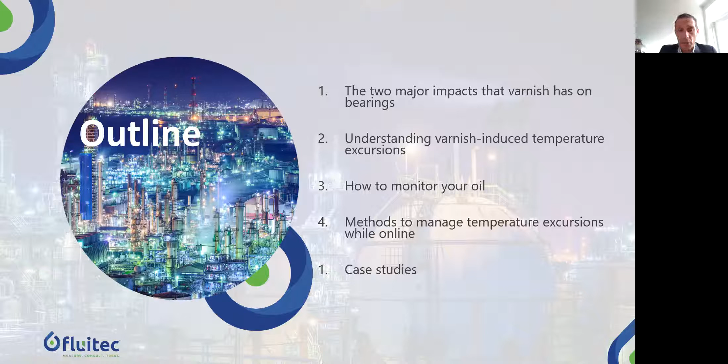And then finally, we will go to the topic of how you want to monitor your oil, and eventually how you can solve the problem if you have a problem of varnishing in your system. Last but not least is a couple of case studies which will help you understand better what I just presented you. Okay, what about varnishing?

What is varnishing? Maybe you heard about that a few times. Varnishing is an organic compound which is a byproduct from the oil that you have in your system, and varnishing can be in different consistencies, so different formats, different colors, and of course there are even different chemistries that make up the deposit. These chemistries are mainly based on how the machine is operated, what is the formulation of the oil, and if you have contaminants, hard contaminants or gas contaminants, which influence the oil degradation.

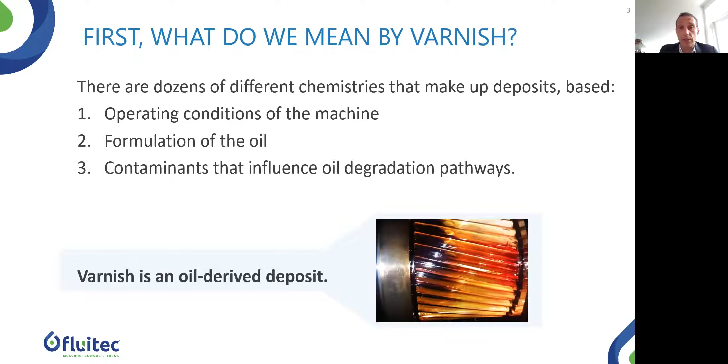So mainly there are four mechanisms which produce degradation in the fluid. First, which is always happening, is oxidation. Oxidation is when the oil is in contact with air, so the antioxidants which are present in the oil will slowly be depleted, and then there will be formation of varnish. Then there is thermal degradation, which is due to sparks, discharge, or microdieseling, hotspots, but that's not what we are going to talk about today.

Then there's one which is mainly common in compressors, especially in syngas compressors: external contaminants like gas, for instance ammonia, or solid particles, or even water, when you are talking about steam turbines for instance.

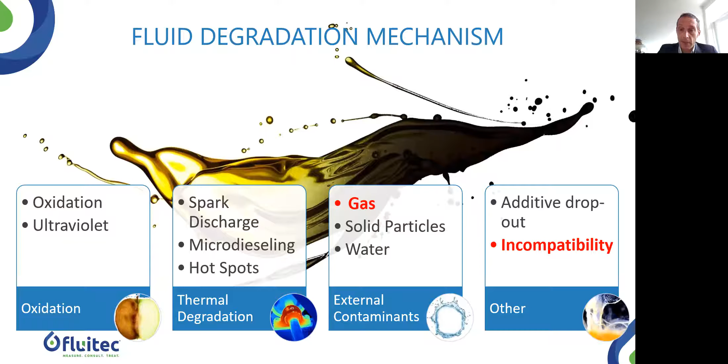And then you have incompatibility. What is incompatibility? Incompatibility is when an oil is mixed with another oil. This is very important because most of the time there are oil companies telling you that you can mix, oh this oil is totally compatible, but it's essential that we keep a very firm rule: the lubricants need to stay isolated from other lubricants.

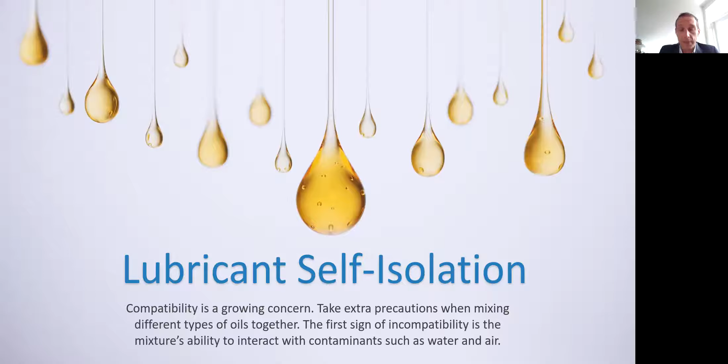This is like how it's happening now in many places due to lockdown. But incompatibility is the first sign that you can see when you have two oils mixed together, so it's creating most likely varnishing. Even the same oil sometimes changes a little bit, like with a new formulation of oil, the existing same oil can sometimes be incompatible and accelerate the varnishing production.

Now that we've talked about varnishing, I told you what is the cause of varnishing, and now we can see a little bit of a picture of varnishing. So varnishing can be like a gel. We see pictures where it's black, or it can be a lacquer, orange lacquer, or it can be even other colors like purple or green or yellowish. And all of this is varnishing, an organic product which is coming from the degradation of your oil.

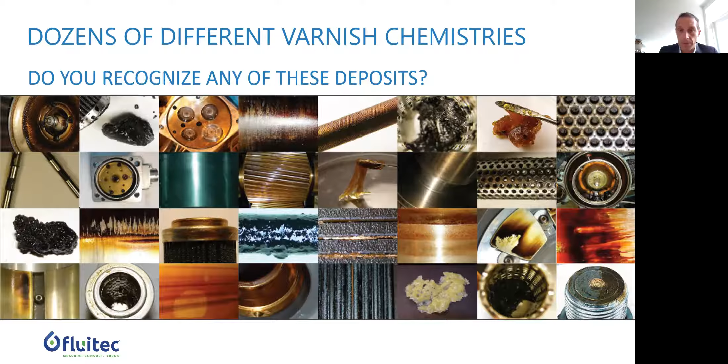So when you have a problem, and now I'm talking more specifically, when you find a problem on your bearing, it can actually be a mechanical problem, but we found almost 50% of the time that this problem is due to chemical change in the composition of your oil. Of course, chemical changes may be due to some other mechanical problem, but these two are correlated. So what we now see is that temperature excursion and wear are both caused by mechanical issues and chemical changes in the oil.

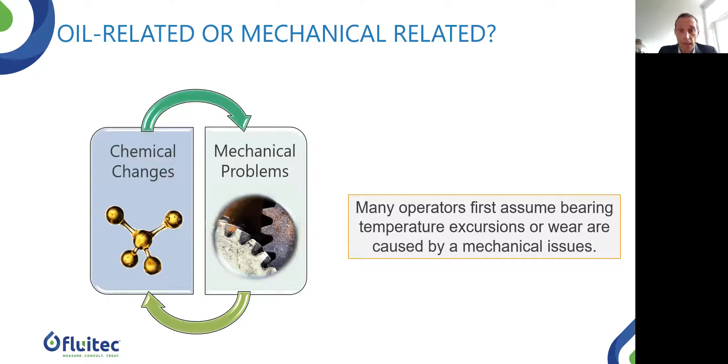So what is the measured impact of varnishing? Actually, there are two measured impacts: one is the increase of wear, and the other one is temperature excursions. So why increase of wear?

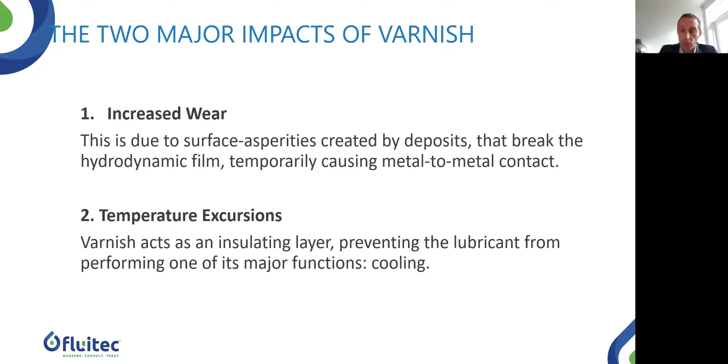Actually, the varnish is a polar compound, and it's depositing on the metal. So it really likes to be attracted and deposit on the metals of, for instance, the bearing. And this compound, of course, changes the film of oil which is created between the rotor, for instance, and the bearing itself. So changing this ends up disrupting the hydrodynamic film and creating inconsistent oil flow patterns.

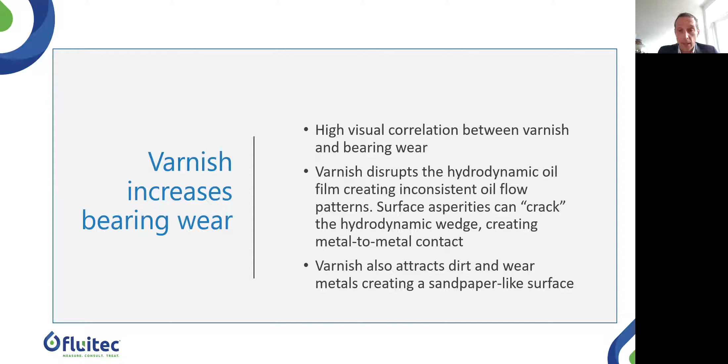So eventually this creates a hydrodynamic crack, which can bring metal in contact again with the other side, the rotor in contact with the bearing. And when this happens, it removes part of the metal, the protection on the bearing.

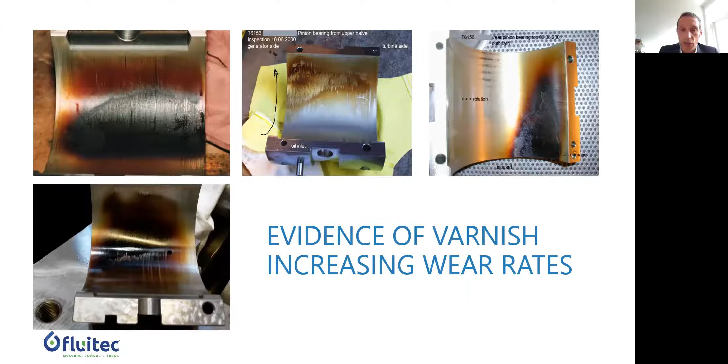This picture shows you what happens, the evidence of varnishing, which increases wear rates. These are pictures of a pinion bearing. You can see on one side the black and orange color, this is where the varnishing has been deposited. This one is quite extreme, but it's a journal bearing where the sign of wear due to metal-to-metal contact is very visible.

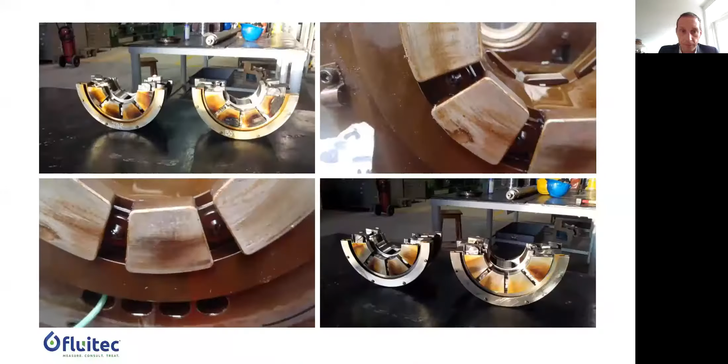Another few pictures about bearing and wear contact. The second problem that varnishing can cause on the bearing is the increase of temperature. Why does this happen? Well, another property of varnishing is that it's a very good insulator, so it prevents the lubricant from performing probably one of its major tasks, which is cooling.

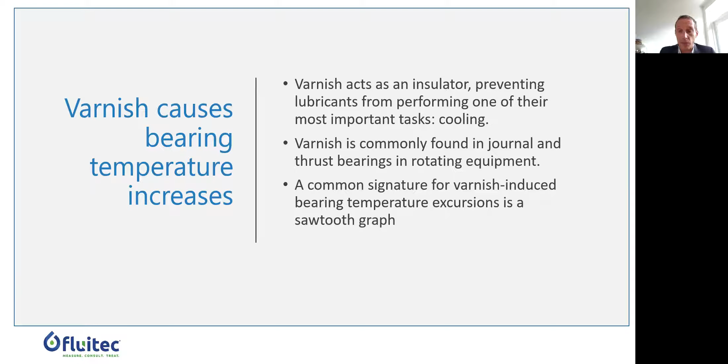This creates a kind of layer, the varnishing is creating a layer between the bearing and the oil, and this is what avoids the cooling effect. This is how you can see that. I'll show you some graphs, but the signal that this is happening is normally what you see as a sawtooth graph in the temperature graph of the bearing. This is the typical graph.

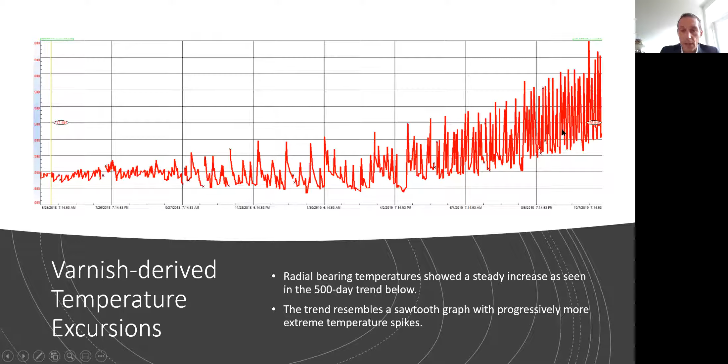At the beginning it's just a little bit, actually less than a few degrees, and then it can go up quite quickly. Why does this trend up and down? Well, this is mainly due to the fact that the varnishing is increasing, so this layer is increasing and then it's wiped off. But I'll show you a couple of slides which explain it better.

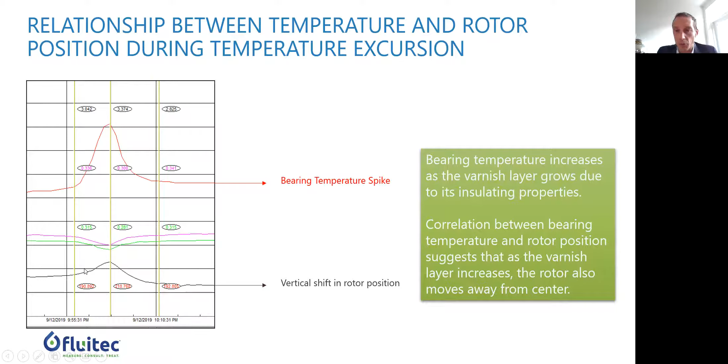Another important factor is that temperature is very well connected to the position of the rotor, and so we found a correlation between vibration as well and temperature. We found that where there is a spike in the temperature, then we have as well a different position, a vertical shift in the rotor position. So there is a correlation between these two.

This is why there is a correlation. After studies, we found out that this is the oil film, this is the rotor, and this is where the varnishing is, the first layer of varnishing is created. If we increase the temperature, because there is no more dissipation, the temperature increases and more varnishing builds up, so there is even more temperature increase.

But as the varnishing builds up, the oil film is changing, so the clearance between the rotor and the bearing is different, and the rotor position is changing, going up. Then more varnishing builds up, and more varnishing means more insulation, more temperature, and the rotor goes up even more because of the different oil film.

When it finally reaches a point where the force to move the shaft becomes greater than the film strength of the deposit, then the varnishing layer is wiped off. The rotor returns almost to the original position, because there's always a little bit of difference. And the bearing temperature goes down because of the loss of the varnishing layer. So that is the correlation between the rotor and the temperature.

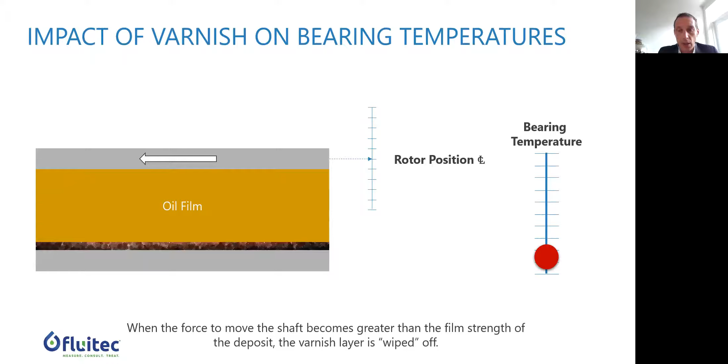This is what we discussed about the bearing, but a similar problem, not identical, but varnishing creates another problem as well in the valves. Why in the valves? Well, a property of varnishing is that when the oil is hot, over 60 degrees, the varnish tends to stay in solution, so it's soluble. This is chemistry, when there is warm liquid, it increases the solubility in this case.

But in the valves it's intermittent, so part of the oil stays in the same position and cools down quite quickly because there isn't a lot of oil there. When it's cooling down, there is much more probability that the varnishing gets out of the oil, so it deposits. This happens, for instance, in the small clearance of the valves, and eventually this makes the valves stick.

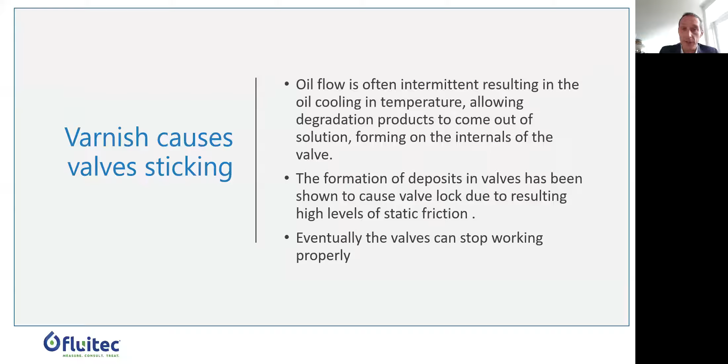So when you try to move the valves, you cannot move them anymore. We calculated the typical cost in case of a trip, and it can be even between $30,000 and $200,000.

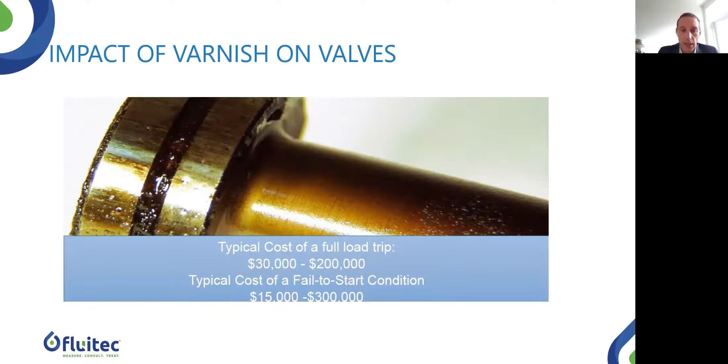This has been calculated for a full load trip, or it can also be a condition where the machine is not starting, maybe after hours of shutdown, or because the machine was used only partially, only intermittently. Then you try to start and there is a fail-to-start condition because the valve is not moving. This can cost even more, up to $300,000.

This is a case from a power generation plant in South Africa, involving an overspeed valve. Unfortunately, in this case there was an overspeed and the valves didn't close because of this varnishing. And this is what happens.

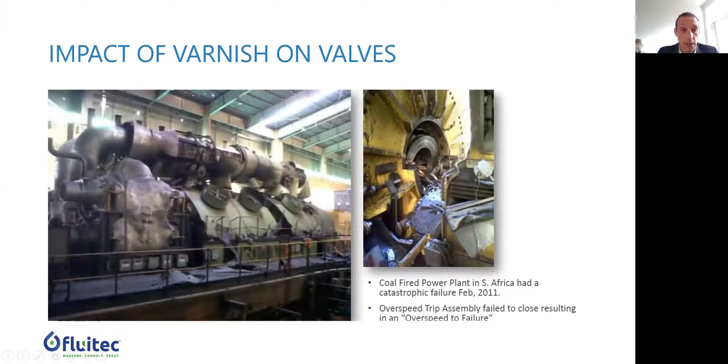Okay, now we want to move on to the topic. We saw what varnishing is, we defined what can be the problem of varnishing, and now we will see how you can know if varnishing is in your system, how you can monitor it, and then we will see how you can solve the problem.

There are several tests which tell you the condition of your oil. It's like a blood test. So when you want to see the condition of your body, you go to the doctor and make a blood test. Similarly, you do with the oil.

But when you talk about varnishing, one of the most important tests is the MPC, membrane patch colorimetry. It gives you a simple idea of how much tendency for varnishing you have in the system. When you see a clear patch, below 20, it means varnishing is not present in your system, or present very lightly. Normally we consider above 35-40 a critical threshold where you really need to take action because you're building up too much varnishing in the system.

Another important test is about the lifetime of the oil. This isn't done very often because it can be more expensive, and there aren't many labs that have this technology, the RULER, even if it's a simple technology. But this RULER test can save you a lot of money because it tells you the lifetime of the oil - whether it can still stay in the system or if you have to change it. So instead of changing the oil every 1, 2, or 3 years according to your maintenance plan, maybe you can prolong the oil in your system one more year.

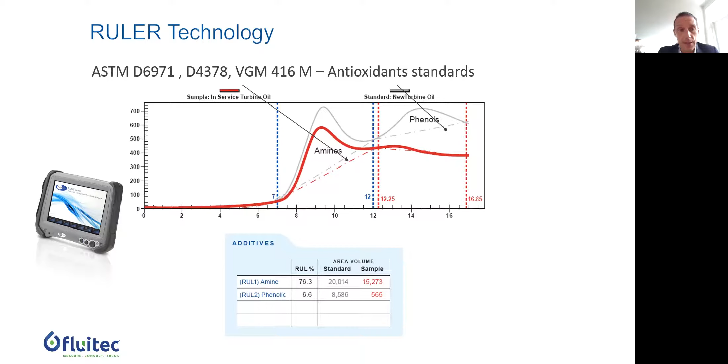So you can save quite some money in the long term. It works simply by comparing the amount of antioxidant in the existing oil compared with fresh oil - same oil but fresh. It gives you the percentage of antioxidant. Antioxidants are the protection - like if you consider an apple, the antioxidant is the skin of the apple. It's what protects the oil, preventing oxidation. Normally in your oil you have two kinds of antioxidant, amine and phenol, and this RULER gives you the percentage of these antioxidants.

But there are many other tests for soft contaminants. You can see MPC, you have the ISO test for fluid degradation, as I said we have the RULER, or you can check the compatibility with contaminants, and then foam air release or water demulsibility. So when you have all these tests, we can tell you, yes, for your oil we can identify what the root cause is, if there is any, and what the status of the oil is.

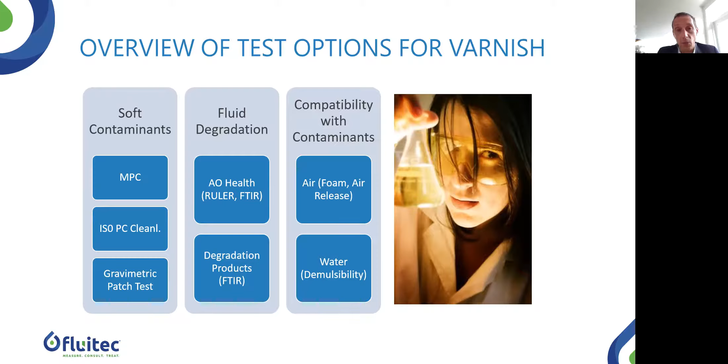Okay, now let's go quickly into how you can solve the problem without shutting down the machine - how you can remove the varnishing from your system. FLUITEC developed two products: one is about filtration technology, and the other is what we call Solvancer technology.

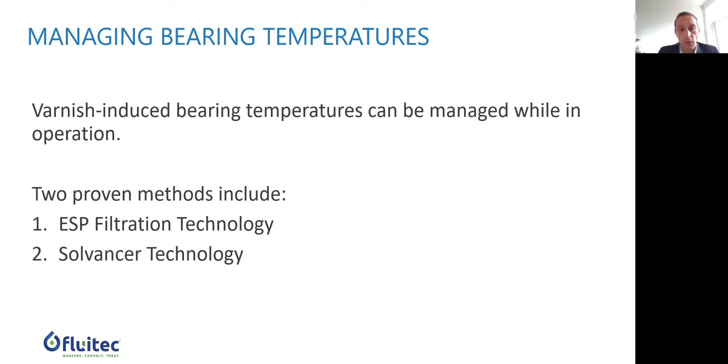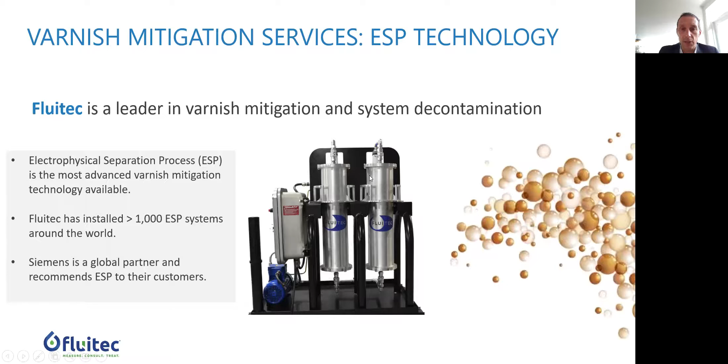The filtration looks like many other filters you may have. It's a kidney loop filtration where your oil is processed through two filter elements. The difference from many others is that FLUITEC has used special resins as media for many years. These resins have the properties to absorb the varnishing in the oil.

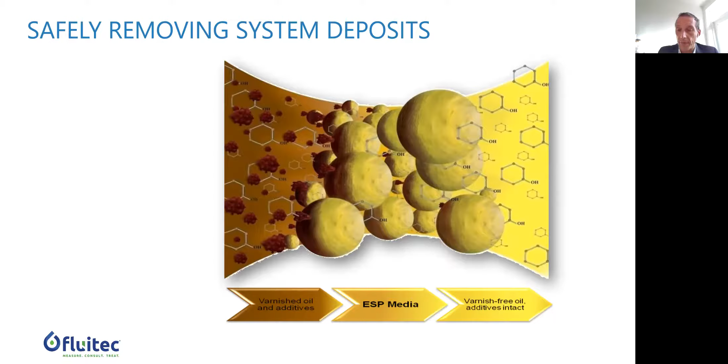But the second method that FLUITEC developed is about increasing the solubility of the oil. Varnishing is a byproduct of the oil - it's organic, but more importantly, it's reversible. What happens in your oil can be reversed.

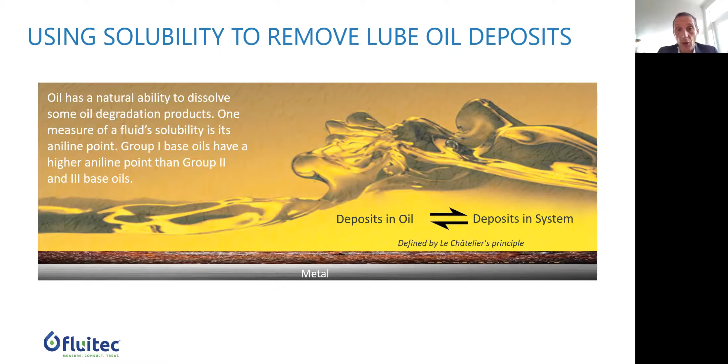So the varnishing can go back into the solution if the solubility of the oil increases. And this is exactly what the Solvancer technology does.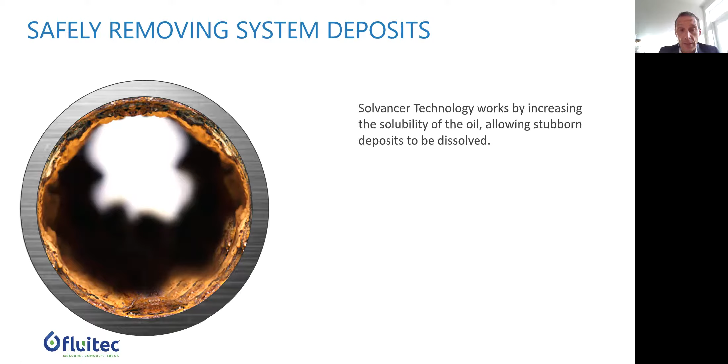Solvancer is a totally compatible group 5 oil, which is added to your oil in a percentage, normally about 5%. And what it does is increase the solubility.

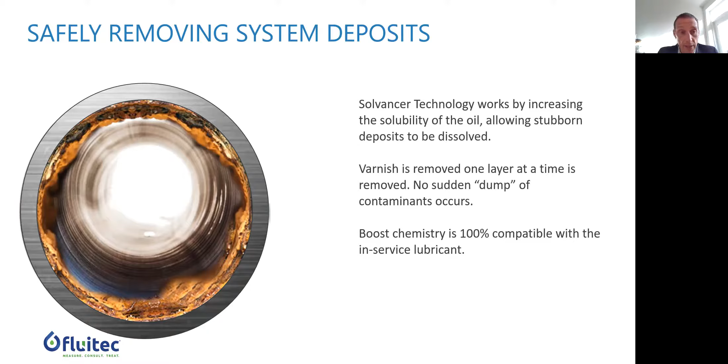Increasing the solubility means removing layer by layer the varnishing from your system, without creating any hard contaminants or damage, because it's absorbing the varnishing that was on the metal layer back into the oil. So it's catching and getting back what the oil released over time.

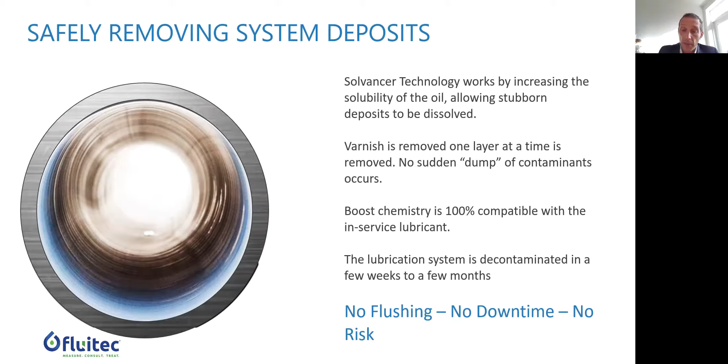In a relatively small amount of time, we're talking about weeks, the system is totally cleaned. The system is cleaned in weeks, but the effect can be very fast. If you have a problem of temperature or vibration, this can be solved in hours. So it's a very quick process.

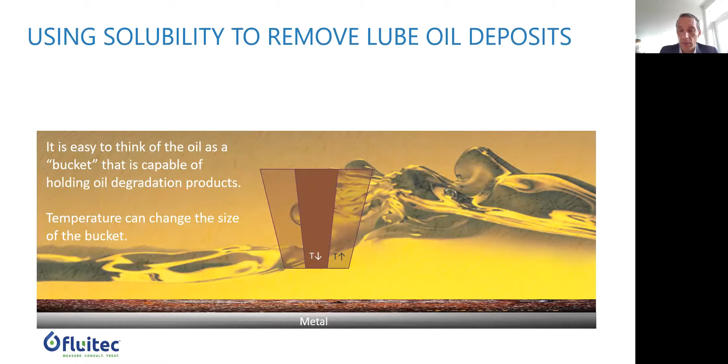If you think about the solubility of an oil at a certain temperature, if you increase the temperature, the solubility of the oil increases, so it's more soluble, but you cannot just increase the temperature. This is not a factor that you can play with.

But with the Solvancer, this is what happens: we increase the bucket in a way that it can collect much more quantity of varnishing. And together with the ESP technology, it not only removes the varnishing, but maintains the quality and the antioxidant properties of the oil over time.

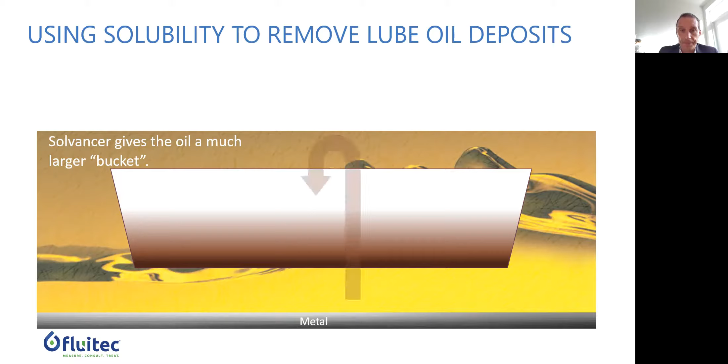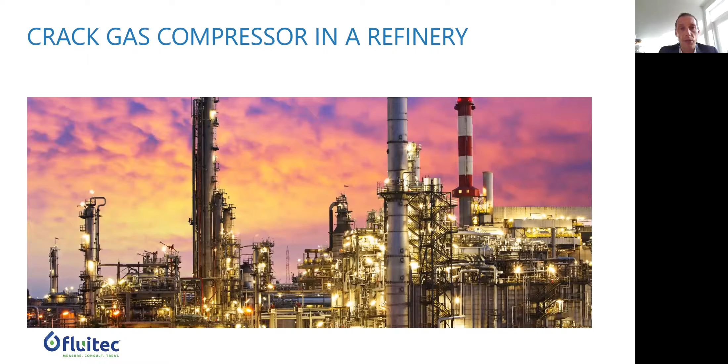A couple of case studies to show you more in detail what I was explaining about this technology. This happened in a cracked gas compressor in a refinery. When they called us, it was not really critical because in terms of varnishing tendency it was 22, so abnormal but not critical.

After one single day, the MPC of the oil, thanks to our Solvancer, dropped to 1, and 4 weeks later it was still at 3. This is because the Solvancer technology acts very fast in the oil, and in a few weeks it will clean the system.

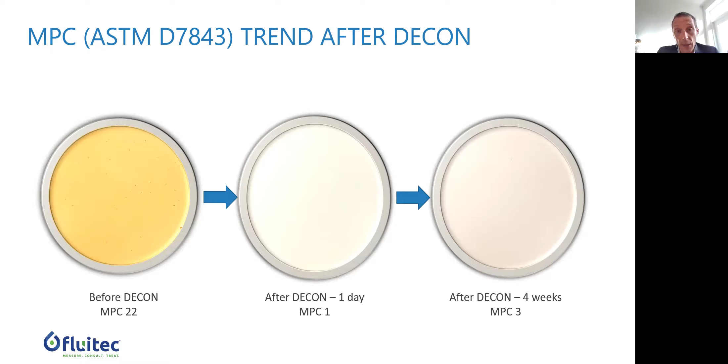And then it can stay in the system. This additional oil, this Solvancer, is not only compatible, but can stay in the system as long as you like, years, till the new shutdown, till the change of the oil.

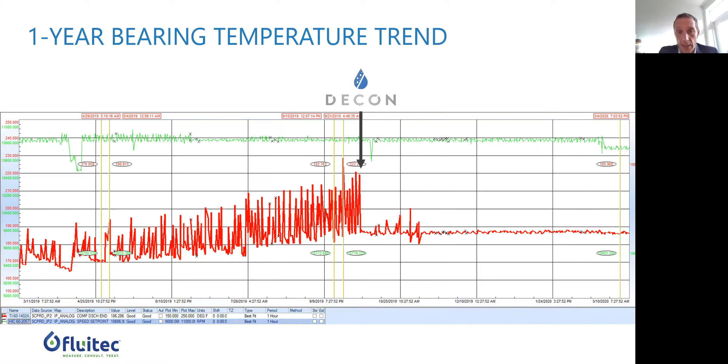Another case was a fertilizer plant, which had a similar problem. They called us because they had the temperature in the bearing going up and down, and they were asking what the problem was. We told them about a possible sawtooth pattern.

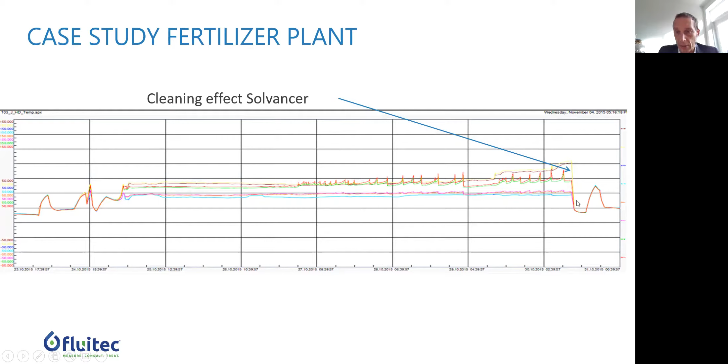We made an analysis of their oil. When finally they used the Solvancer product, there was immediately a drop, within hours, and it stabilized. This is when the Solvancer was added, and what happens from that point on.

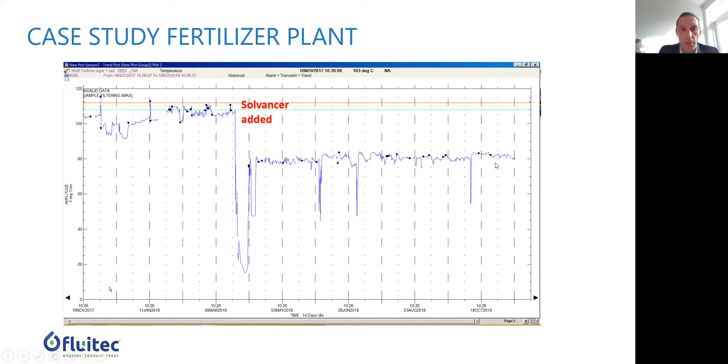So the conclusion is the varnishing is often the cause of bearing temperature excursions, and you can normally see it with a sawtooth temperature trend. You can control the varnishing in your system, and there are different methods for monitoring it: MPC, ruler, and many other tests.

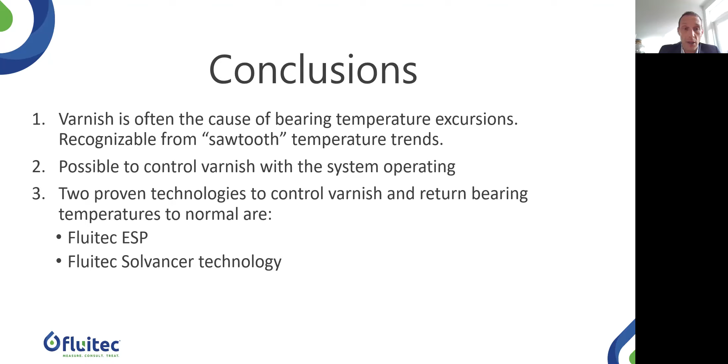We have proven technology, sold more than hundreds around the world, for controlling varnishing, removing the varnishing, and returning the bearing temperature to normal, all without shutting down the plant. So in reality it's saving you money, not only because it's protecting your system, but because it's preventing you from having to shut down the plant.

We even have our own product, called Infinity, which can stay in the system. What we want to do is reduce the outage of your machine, maintain your oil, and of course at the end, save the environment, because you don't have to change the oil, and you can reduce the amount of oil that you ultimately dispose of in the environment.